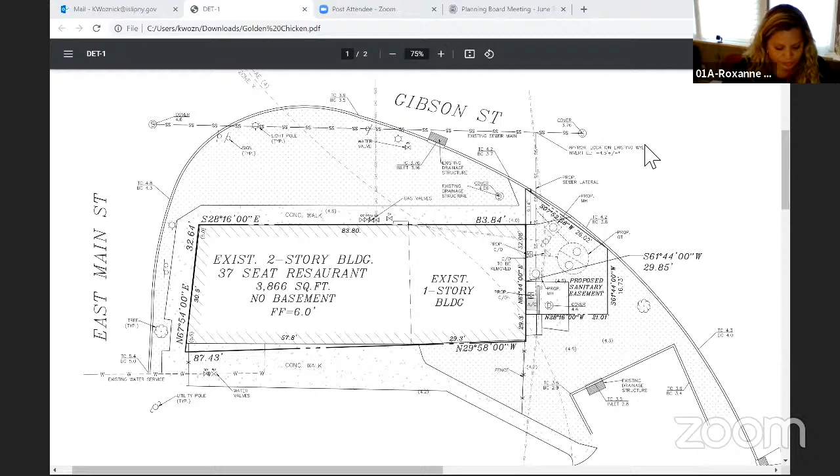Great, thank you. I do not see anyone who has signed up to speak on this application. Did anyone join us later who wishes to be heard? Please raise your hand or hit star 9 if you're on the phone.

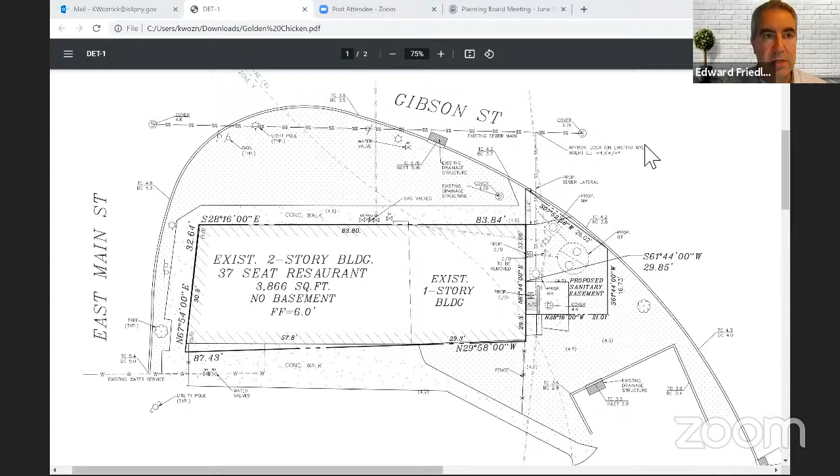Thank you, Ms. Wozniak. Any questions for the applicant? Any questions from Ms. Wozniak? Anything further from the applicant?

Mr. Chairman, just a question. Mr. Moriarty. Thank you, Mr. Chair.

Where is the current garbage located? I have no problem with the application, I think it's a good use. Obviously it's been in existence for quite a significant amount of time, but the rear of that building tends to be a mess. It's on a busy intersection in downtown Bayshore. It looks to me, and it's not just this particular applicant, so that's the question I'm asking, there appears to be 3 garbage disposal containers in a public parking lot back there. I know it's been going on for a long period of time, but it seems to me if we get a chance to at least put some screen up with respect to the garbage that's actually servicing that particular restaurant. So I guess the question I have for the applicant is, how is garbage currently being disposed of?

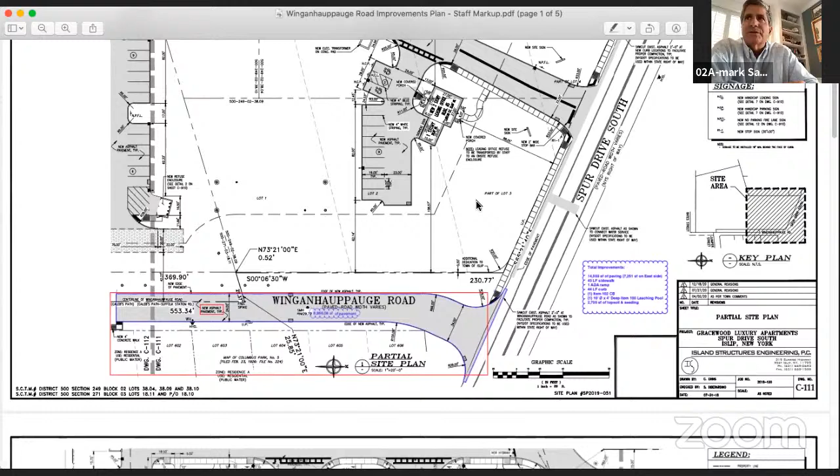Gracewood Luxury Apartments, owned partly by Spur Drive LLC, is a 96-unit apartment project located in Islip that is going through its final stages for its building permit. To fully understand the unusual circumstances of these additional improvements, I'd like to elaborate on our agreed-upon improvements on Winganhauppauge Road and Juniper Street, which we worked on with Lisa Anderson and several of our easterly neighbors.

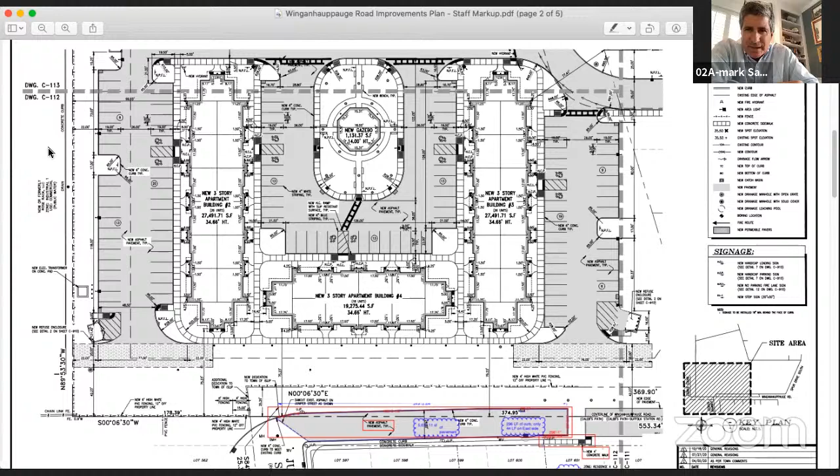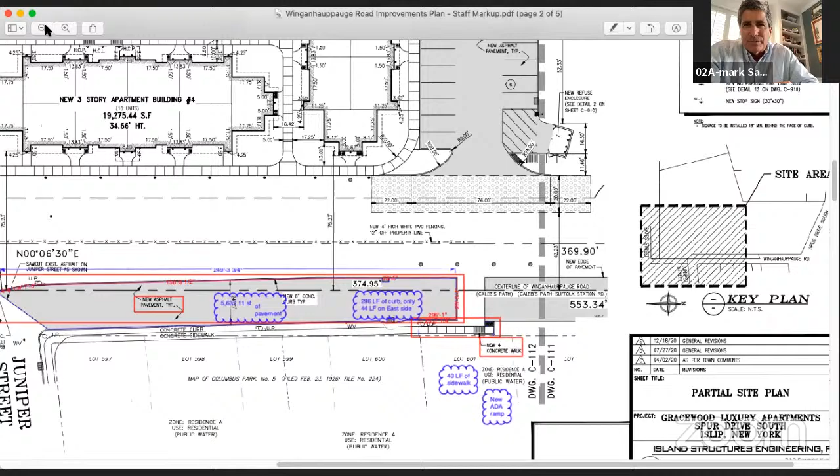That's the Juniper side we're showing now. It's the same street, but it has two different names, divided by an island in the middle. If we go a little further north, the roadway south of Spur Drive is Winganhauppauge Road. If you look at that dotted line, north of that is Winganhauppauge Road.

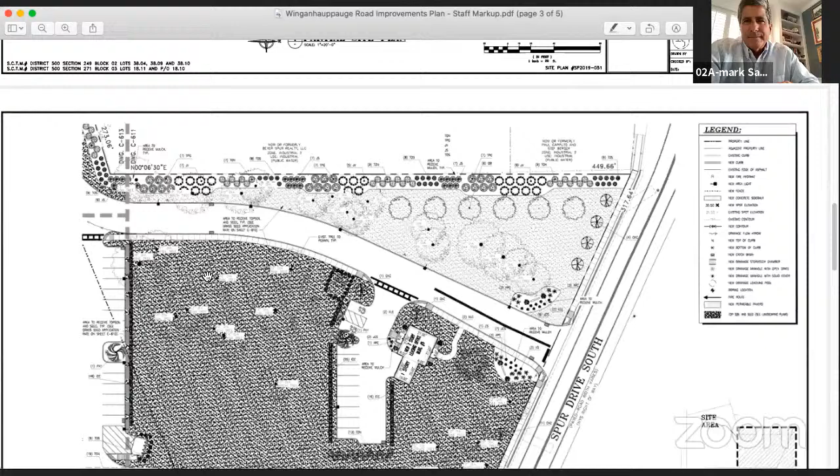That keeps scrolling down. I'm not sure if the board members can see Winganhauppauge, a little further down. Here it is. So off of Spur Drive it's called Winganhauppauge Road, then there's an island, then it's Juniper Street, which comes in off Islip Avenue.

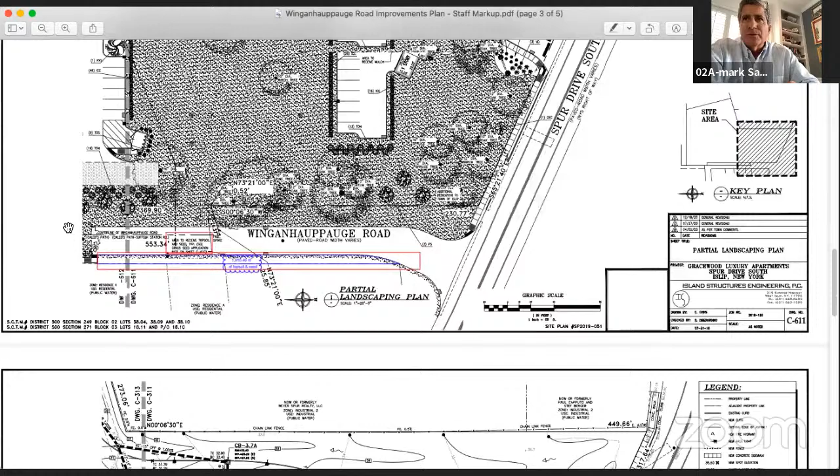So the roadway south of Spur Drive is Winganhauppauge, and there are a couple of homes on the east side of that street. As you travel south you'll encounter the landscaped island that separates Winganhauppauge Road from Juniper Street. On Juniper there are three homes, also on the east side, with the exception of one home owned by the Tavellas, which abuts our property on the southwest portion of Juniper. So there are three houses along there, and then one right there, which is Maria Tavella's house.

Per the town recommendation and our own normal course of business, we reached out to and listened to our neighbors' concerns and worked with them on objections and needs as we went through our change of zone. Over about 18 months we had several meetings, gained their confidence by showing them current and past projects, had them speak to existing tenants, and worked with them on improvements to enhance their frontage and resolve their individual road issues.

The residents on Winganhauppauge Road have a roadway that's partially broken asphalt and mostly RCA or stone, with some drainage issues. We agreed with those homeowners to correct the drainage issue by putting drainage in and redoing the entire roadway from Spur Drive right up to the landscaped island, on both sides of the road.

Those residents wanted to keep the rural look, so they were adamant about not having curbs and sidewalks. But they did agree to the town of Islip fence required along the easterly property line that we have to install.

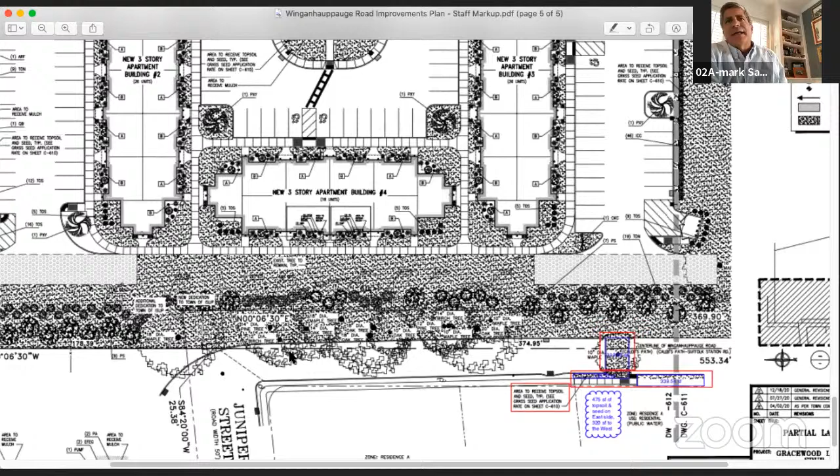There is existing drainage already on Juniper as well. Now, the existing landscaping island that separates the two will be completely removed and redone with new plantings and a sidewalk that would only allow pedestrians to walk from Winganhauppauge to Juniper and vice versa. That island was something of a bone of contention early on with the town, but they agreed to leave it because I guess at one point cars were going through from Spur Drive to Islip Avenue. It was a cut-through area.

So all the homeowners there, as we left it, were extremely happy with what we were doing. So in hopes that I explained this properly to the chairman and the board, my request for relief is to show that in round numbers, we are planning on investing about $220,000 or so, and that was pre-COVID pricing. That was done about a year and a half ago, into the town right-of-way, of which about 120 of it is above and beyond what we calculated as our normal Town of Islip code obligations, including mitigation fees.

We feel that the $18,720 is not really fair and request that we get relief. We do understand that it's a code, and that's why we're here this evening. I would like to say that the town's always been fair and equitable with all my projects spanning some 40 years now, and I believe with this application we met both the needs of the residents and the Town of Islip. So with your consideration for relief on this matter, it would be greatly appreciated. If you'd like, I have a photo looking from Spur Drive down Winganhauppauge, a picture's worth 1,000 words. I'm just not sure how to do it on my iPhone, but I could certainly show it to you.

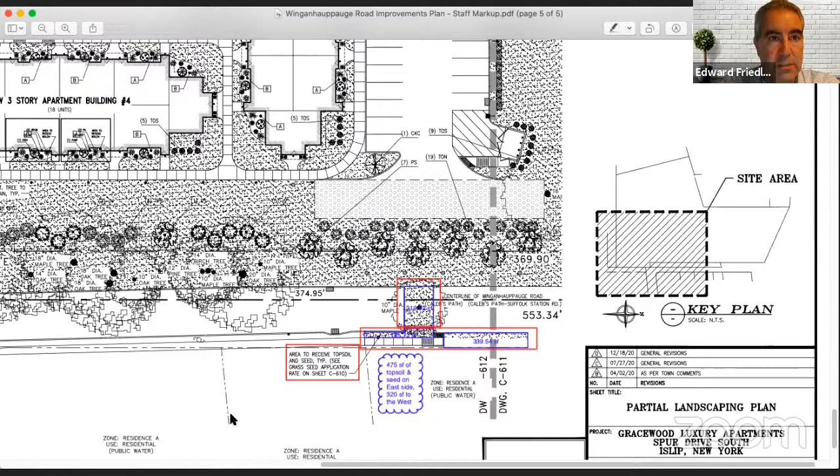Not seeing any. I would like to see the pictures. Okay, uh-oh, tell me, go downhill from here. Let's see how good your technology skills are. All right, Tanner, I need your help. All right, let's see.

Thank you. Any further questions? Anything further from the applicant? No, I'm fine, thank you. Is there a motion?

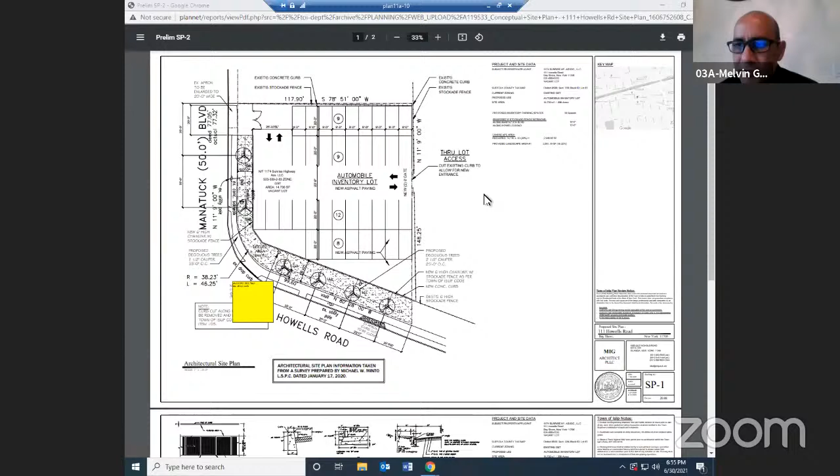Good evening to the applicant. Good evening, Mr. Chairman and members of the board. My name is Mel Gonzalez, MIG Architect, PLLC, 1050 Old Nichols Road, Suite 200, Islandia, New York, 11749. I'm here representing the owners of the subject property on the corner of Manatuck Boulevard and Howells Road.

What we're proposing is, currently the lot is vacant. We had been before the board previously, and the planning department had requested some information with respect to some comments that were addressed in our preliminary site plan. We've complied with those items, and one of the items on their concern list was with respect to photometrics on the property.

What we've done is the owners hired a company to provide photometrics not only of our proposed project, but also of the adjoining dealership, Bright Bay Lincoln, along Manatuck Boulevard and Sunrise Highway. We submitted the photometrics to the planning department for review. We provided two types of photometrics: the current photometrics of the existing light fixtures, and what we're proposing on our subject property. In addition, we proposed photometrics with shielding of the existing light fixtures to mitigate any exposure or spread of lighting into the residential neighborhood.

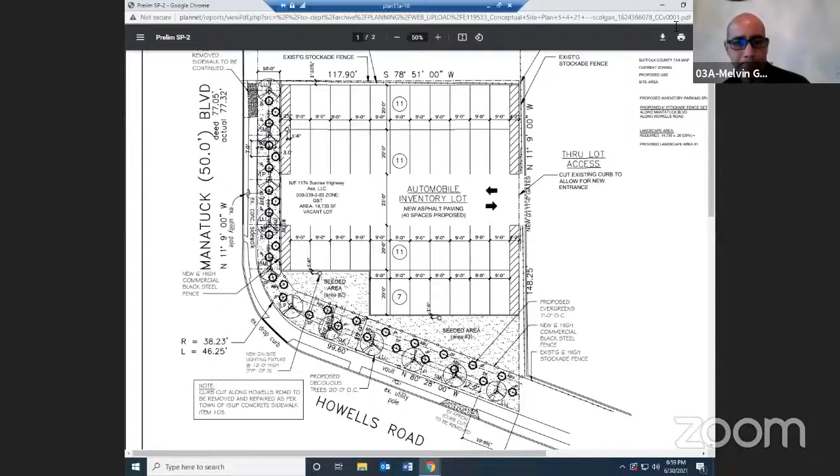Thank you, Mr. Chairman, members of the board. This application was previously heard on December 9th last year. The primary concerns raised then were the landscaping, the lighting, and roadway drainage. The applicant submitted a revised site plan, which shows additional landscaping and closes off the Manatuck Boulevard curb cut.

Any new lighting on the subject property will be required to prevent light trespass. The drainage is reviewed in conjunction with site plan review, which will be required should this application be approved by the board. Staff has further recommended additional plantings along Manatuck Boulevard north of the subject site.

Staff has discussed these issues with the town engineer. He has suggested that the existing lighting be reviewed by an engineering inspector and require additional shielding of those lights if necessary based on the results of that inspection. In addition, he requested additional plantings as space permits, and opaque fencing behind the front yard landscaping to better mitigate any light glare from the proposed lights and the existing lights on the existing dealership.

If the board is satisfied that the proposed layout and covenants address these concerns, staff recommends that the board grant the application subject to these conditions and the covenants attached in your packets. Thank you. Any questions from the board?

Mr. Gonzalez: I think there are about four things that Mr. Colgan outlined. I want to make sure the applicant is okay with those. First, if needed, additional shielding to lighting will be provided if the town engineer determines it's needed. Response: Yes, that's acceptable to the client.

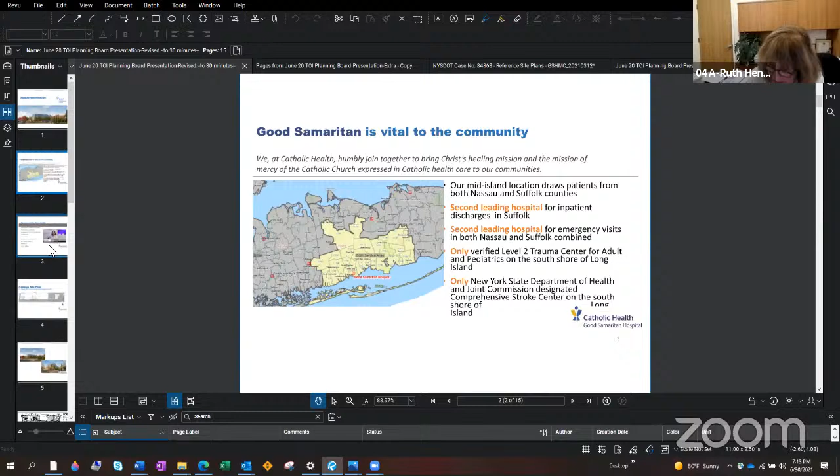Could you back up one slide, please? Thank you. Good Samaritan is vital to the community. You'll note on the map included, the pale yellow area represents the Good Samaritan primary and secondary service area. We are the second leading hospital for inpatient discharges in Suffolk County, and the second leading hospital for emergency department visits in both Nassau and Suffolk County. We're the only level 2 designated trauma center for adult and pediatrics on the South Shore of Long Island.

And we're the only New York State Department of Health and Joint Commission designated comprehensive stroke center on the South Shore of Long Island. Please advance the slide. In addition to serving the needs of the community through healthcare prevention services provided in outpatient, inpatient, subacute, and home care settings, we are a proud sponsor of many groups and activities. Good Samaritan has enjoyed a long history of service to the community through comprehensive clinical programs, such as the Cancer Institute and Comprehensive Stroke Center. In addition to responsiveness to community circumstances, years ago we weathered the storm with Hurricane Sandy, which identified new facility needs required to provide care in a safe and effective manner during times of natural disaster.

Most recently, we rose to the needs of the community with the diagnosis, treatment, and care of those impacted by the coronavirus pandemic. This presented an enormous need for the community. We treated over 3,200 inpatients, provided vital monoclonal antibody treatments for hundreds of outpatients through our emergency department, in addition to serving as a significant resource for testing and vaccination initiatives in our primary and secondary service areas. With that, I would like to turn it over to Mr. Joseph Liacano, who is Good Samaritan Senior Vice President for Business Development and Planning. Thank you.

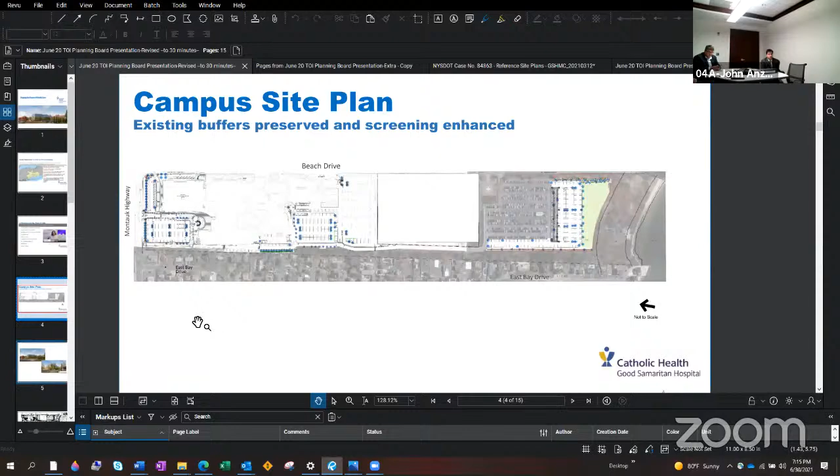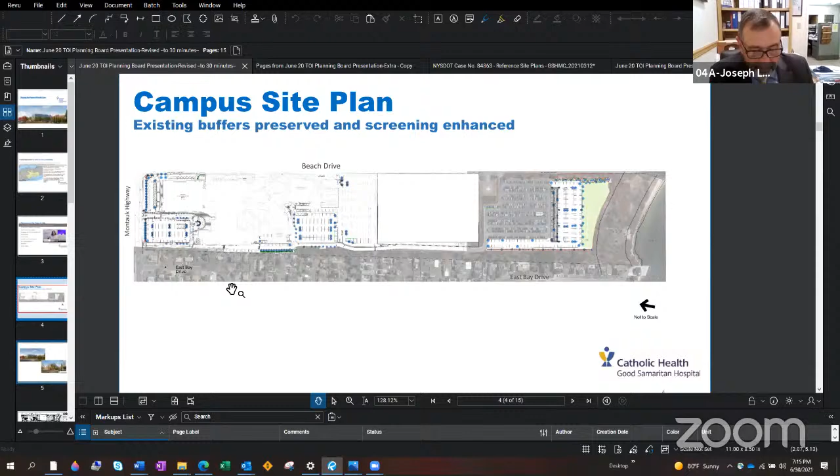Sorry, I was muted. Thank you, Ruth, and thank you to members of the Planning Board for hearing our application. Over the past 2 years, Good Samaritan's leadership team has had the opportunity to meet with various community organizations, resident associations, and individually with many of our neighbors. I'd like to thank many of those residents who I've had the opportunity to meet with personally at their homes. In some cases, they've invited me into their homes to look at what our facility would look like from their decks and kitchen windows. I thank you very much for that input. The purpose of those meetings was to inform the community with clear, transparent, and accurate information, and to hear feedback, comments, and concerns, particularly from nearby residents.

Community comments were mainly focused around parking, traffic, and aesthetics. This slide shows an overall view of the campus, stretching from Montauk Highway on the left all the way to the water, the Great South Bay, on the right. We were able to illustrate the location of different homes and the impact of the facility project by overlaying Google Maps onto the facility's site plan.

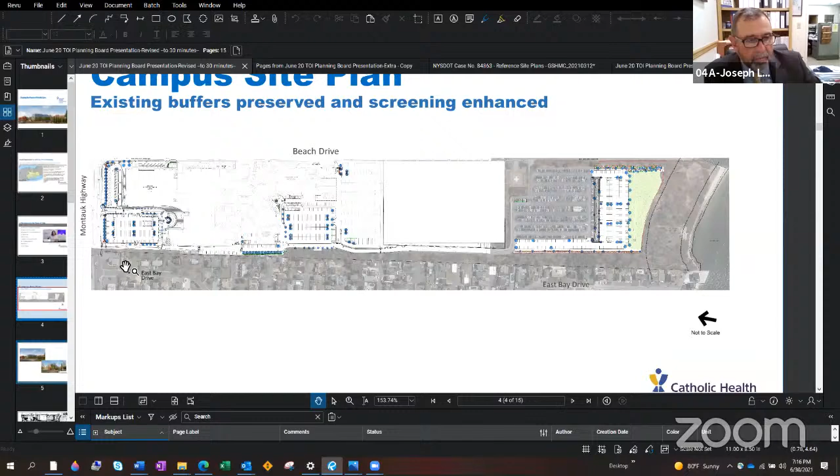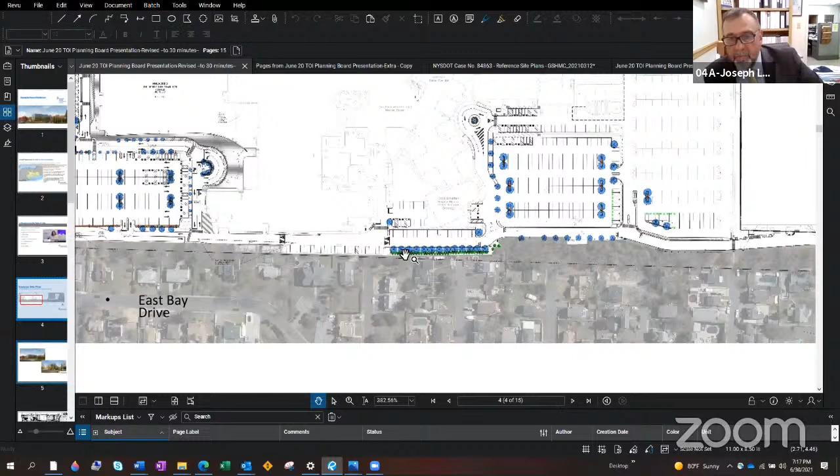Moving down what we call our West Drive from Montauk Highway—Dan, if you just follow the cursor down to the first buffer, this is where, right there, thank you—this is where Mr. Anzalone was speaking about. Right there, the homes are very close to the existing West Drive and a parking area. We've relocated that parking area and expanded the buffer with plantings of mature growth trees. I believe they're called 5-inch caliber trees, but they're about 14 to 16 feet in height. As we continue further down, you can see the existing buffer is not disturbed at all, so the buffer that we enjoy now remains. Keep going south, Kevin, Dan, please.

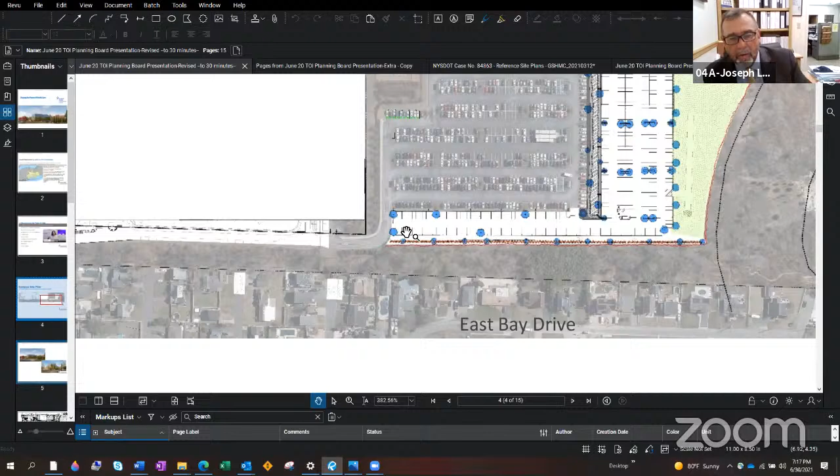We are proposing to add some additional parking for our employees, depicted in the white area here. That parking will allow employees a place to park, and will also allow more convenient, close-by parking near the clinical area of the hospital for the convenience and safety of our patients and visitors.

We've taken further steps with the parking area, and I've had the opportunity to meet with a lot of the neighbors along that western border, because what we want to do is shield or screen that new parking area and the old parking area from view. The red line shown is a tightly packed, densely planted row of 14 to 16 foot evergreen trees, which will enhance the existing buffer and screen the view from the parking lot. We were able to do the same thing on the eastern side of the hospital.

Where the cursor is now is along the marina and ball fields. Again, we were able to plant, without disturbing the existing buffer, another tightly packed row of mature growth evergreen trees in addition.

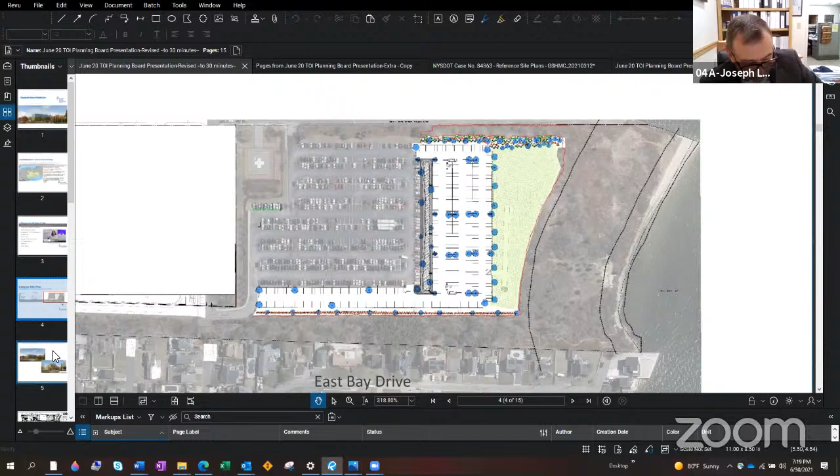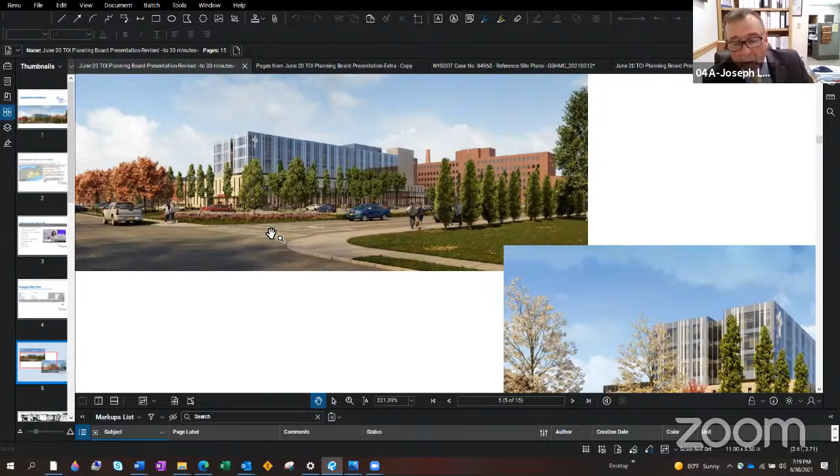This is a view of the proposed building. The first one on the left is a view from Montauk Highway looking east, which is what we call our West Drive. On the right, that is a view down what we call our Center Drive from Montauk Highway, which would be the primary access to the emergency room.

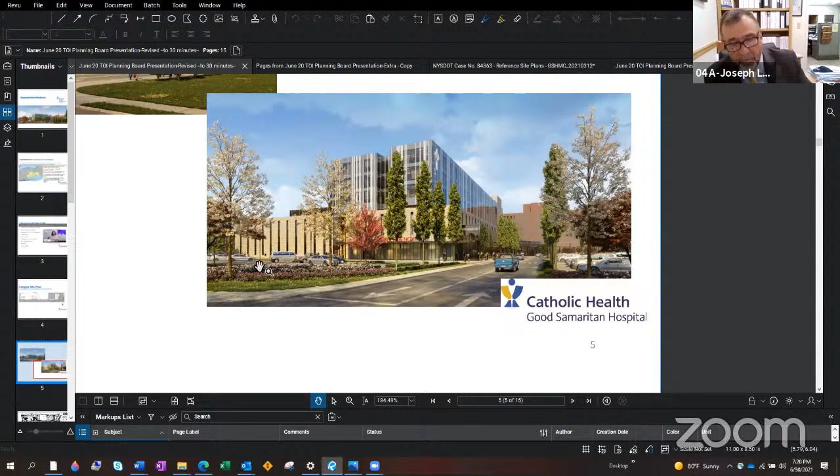Where that blue pickup truck is would be the drop-off area. The truck would go in, make a left, and drop patients off right there at the emergency department, then park in front of it. There's no access to the emergency department any longer from Beach Drive, and the emergency department is relocated away from the residential area and ball fields on Beach Drive to the northern end of the campus.

The building architecture is built on the notion of enhancing patient experience. The glass gallery and the stone base create a welcoming experience, help in finding one's destination, and enhance the patient experience while reducing anxiety.

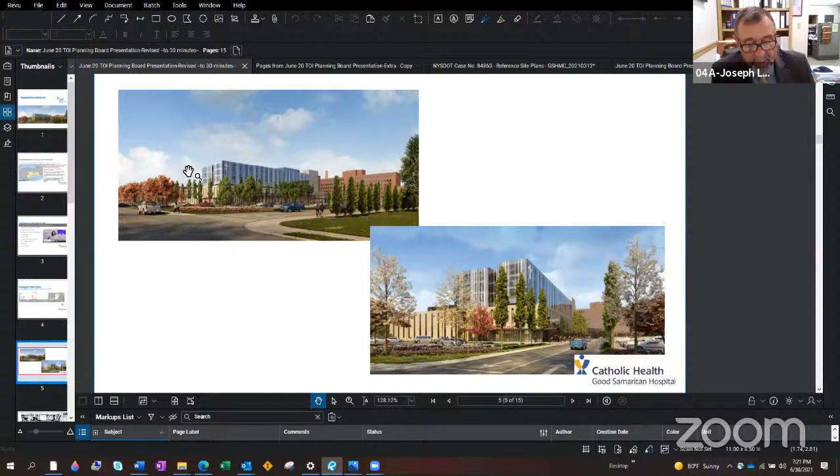We opted for the stone base with intentional window slots, as it reflects the strong foundation of the hospital - a modern interpretation as an anchor base, similar to the beacon structures on Jones Beach created by Robert Moses. We wanted the patient rooms to be elevated and light in materiality, so we opted for a glass and frit pattern. Improved visibility for patients will help ease anxiety for hospitalized patients and reflects the modern advancement of medicine. The glazing will also help reflect the surrounding area, making it less of a pronounced mass, lighter on the eyes than if it had been more solid, such as continuing the brick of the existing hospital.

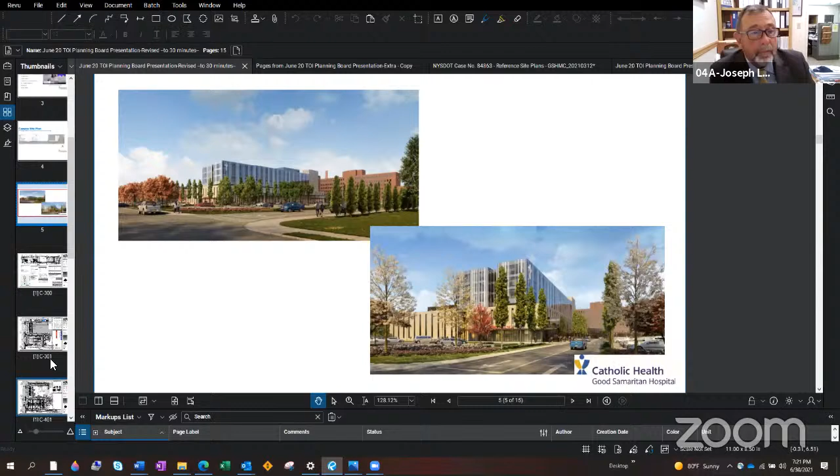Next slide, please. We are going to move further down into John McMurray's section.

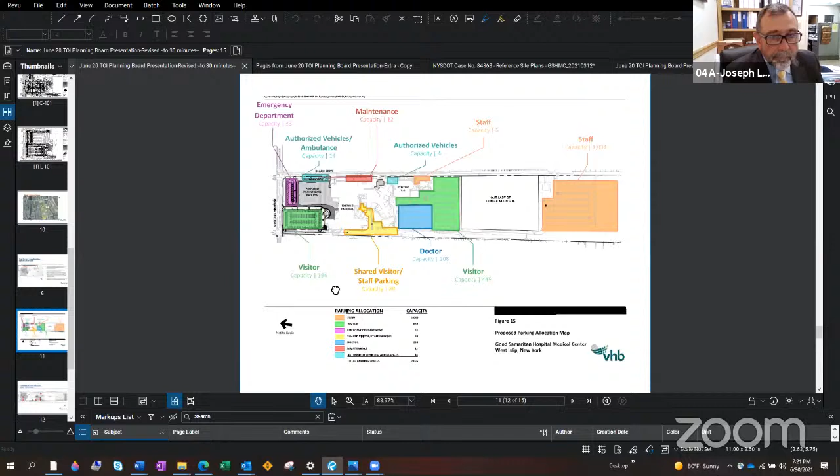Leading into the planning of the project, we acknowledge the need to address campus parking concerns. We've had great success enforcing our patient and visitor policies with our clinical staff and employees, and expect that to continue throughout all phases of construction.

As you'll hear from our traffic study overview, we anticipate a reduction of traffic on Beach Drive due to the relocation of the emergency department to the front of the campus, as well as the elimination of visitors and staff having the ability to egress onto Beach Drive and enter the emergency department. We've also planned to eliminate access to the employee parking lot by employees from Beach Drive through the nursing home. That was a suggestion made by some local residents, and we're thankful for that.

Lastly, during the post-construction phase, the campus parking transformation will result in a convenient patient and visitor focus moving into the future. As you can see from the slide, visitor parking is close up near the hospital, while employee or staff parking is located furthest away, with a shuttle bus provided for the safety and convenience of staff getting back to work. Doctors' parking is also close by the hospital, along with parking for the emergency room.

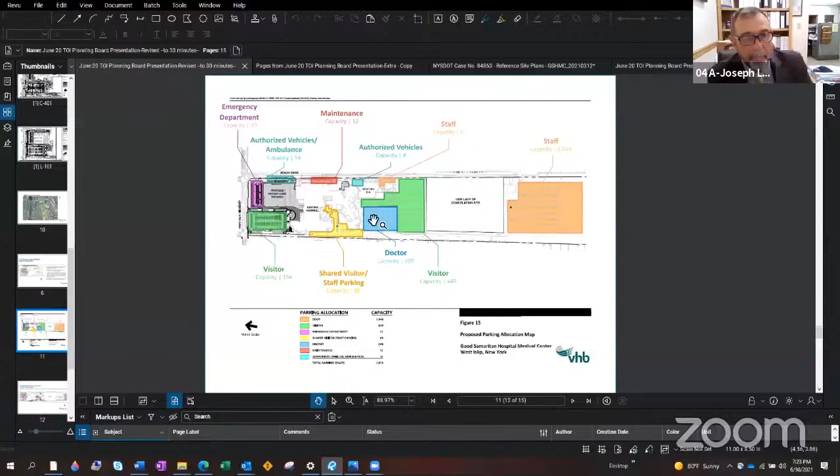This slide shows the location of the proposed patient care pavilion and the proposed emergency room, relocated from its existing location north to Montauk Highway, essentially.

Some highlights: we've eliminated the entrance to the emergency room from Beach Drive to reduce traffic, and redirected the cars to our center drive.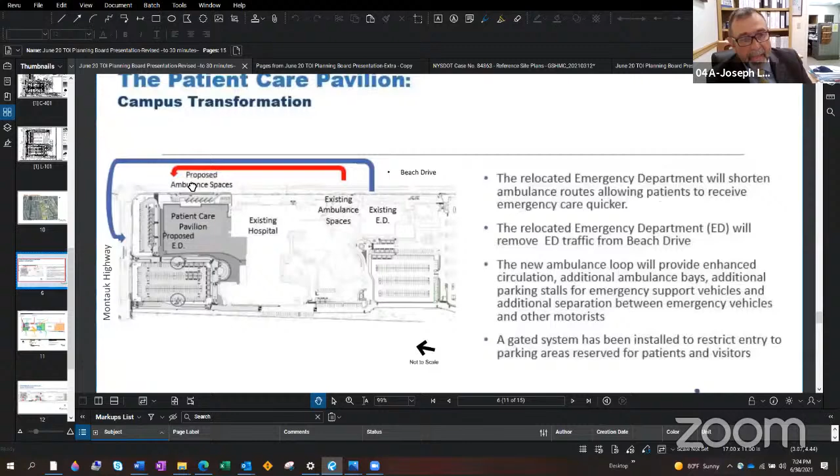We've also been able to create a new ambulance drop-off area along Beach Drive. That area is a little different than the one we have now to the south, as it'll accommodate 4 more ambulances and allow them to do all their backup and drop-off maneuvers off of Beach Drive without obstructing traffic. We took input from the ambulance crews from various local departments, and they were very instrumental in designing that drop-off, and I thank them for that.

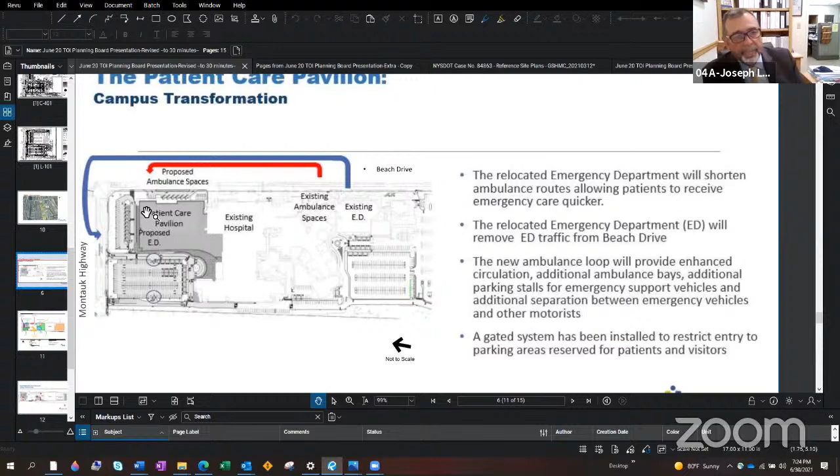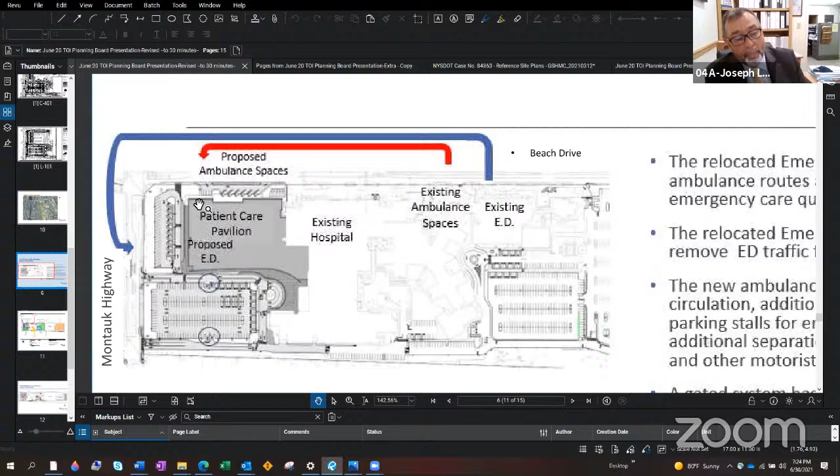We've also taken note, through our many discussions with residents, about emergency vehicles and law enforcement vehicles sometimes parking along Beach Drive with their wheels on the curb. So what we've done is create a special restricted parking area for police cars only. That area is conveniently located near an entrance to the emergency room, providing fast and easy access for police cars, eliminating the need for them to pull up on the curb and block the sidewalk and traffic. I'm confident that parking area will be well utilized.

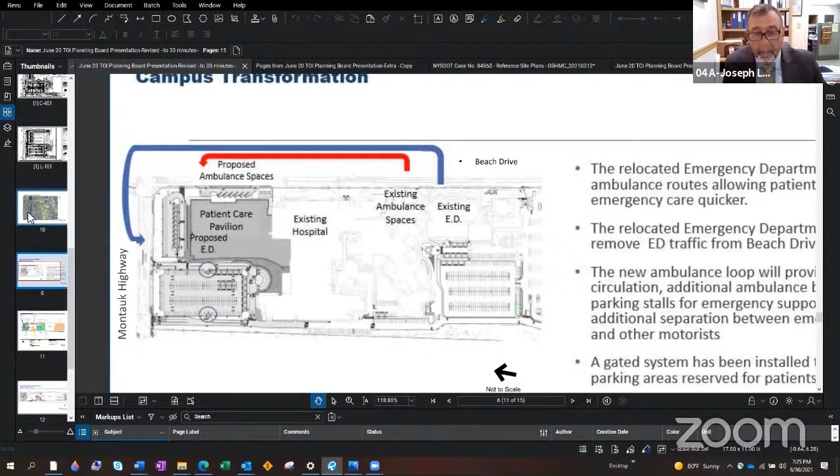At this point, I'll turn the presentation over to Kevin Walsh, our Senior Managing Director for our civil engineer, VHB.

Thanks, Joe. Good evening, members of the board. What I'm going to do is briefly, hopefully without repeating too much of what you've heard, walk through the site plan documents for some visual context on the improvements being proposed.

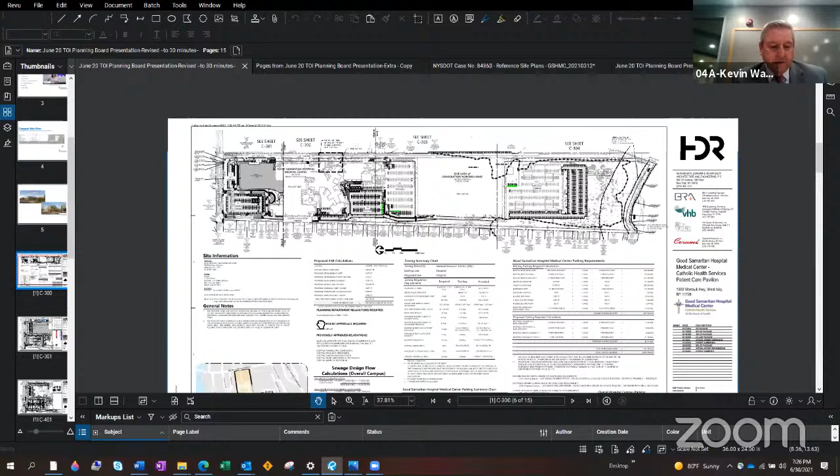Some of the things talked about so far you may see more clearly on the engineering plans as we go through them. As you know, the campus extends from Montauk Highway, a New York State road, to the Great South Bay, bordered on the east by Beach Drive across from St. John the Baptist High School, a residential neighborhood, a town park with ball fields and a marina, and on the west by the residential neighborhood we've been referring to.

The current site of the proposed patient care pavilion predominantly consists today of the visitor parking area and the main entrance loop. We'll point out on this plan, as well as the next, the location of the current emergency department ambulance drop-off area, about 1,200 feet south of Montauk Highway on Beach Drive, basically opposite the south end of St. John the Baptist. You'll see in contrast on the coming slides the proposed relocation of that facility in just a second.

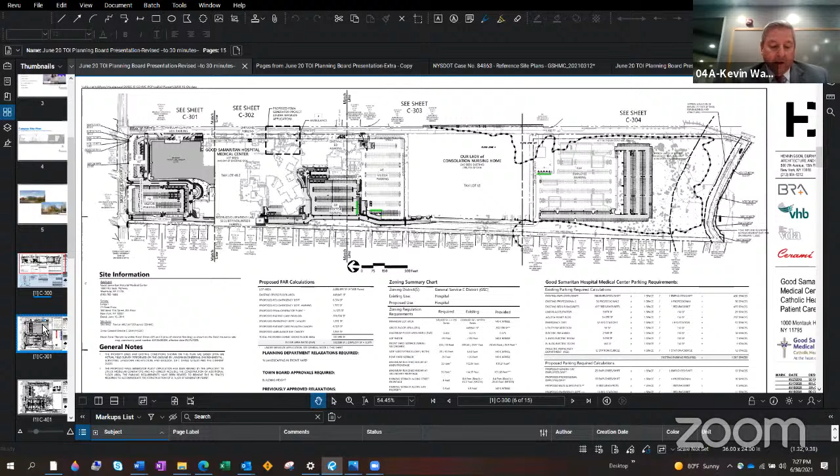The rest of this sheet basically covers zoning compliance, discussed in detail by Mr. Anzalone, so I'll skip over that. I'll also leave the discussion of parking and site access to Mr. Winkleman, who will follow me in this presentation. Let's go to the next one.

Here we have the larger scale detail of the site layout, focusing on the patient care pavilion site, the subject of this discussion tonight. The patient care pavilion will be an extension off the front or north side of the existing building, generally displacing the existing visitor parking lot, as I mentioned. The proposed building is approximately 337 feet by 248 feet in gross dimensions, 6 stories in height, comprising approximately 300,000 square feet of gross floor area.

As part of these improvements, the emergency department is being relocated from the area noted before to the new patient care pavilion addition, with the ambulance bays located along the east side of the new addition, providing 6 dedicated ambulance bays, plus additional separate parking for police and security vehicles, as Mr. Loicano pointed out.

The emergency department general drop-off area is located along the front or north side of the new addition, with one-way circulation from the center access drive, providing drop-off lanes along the front of the building and allowing vehicles to continue around the loop to the emergency department parking, where there are 33 total spaces provided.

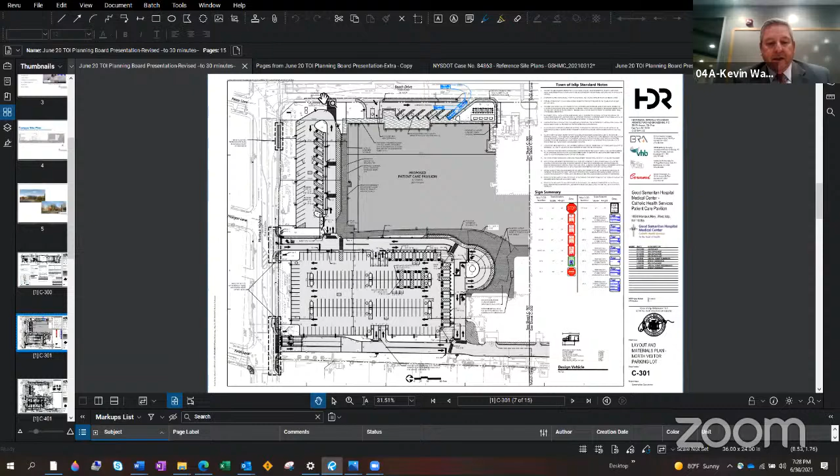I'm sorry, stay there for a second, Dan. I just want to go back and point out that the access drive or driveway shown to Beach Drive from the emergency drop-off area is for fire access only, to meet fire codes for the maneuvering of emergency vehicles that may not be able to make that turn should they need to be in that area.

That will not be open to the public. It'll be covered with grass pavers or something along those lines, and again will serve for emergency purposes only.

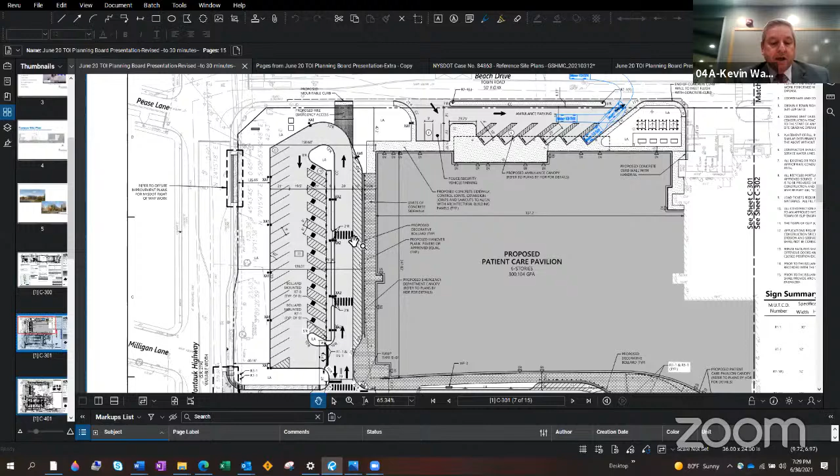I'll mention while we're on this slide that we're maintaining the existing location of the center access drive, which feeds the emergency department drop-off and parking, as well as the newly reconstructed northwest parking lot. It connects to the new drop-off loop at the main entrance, and then it continues to the west road as before. Okay, now we can move on.

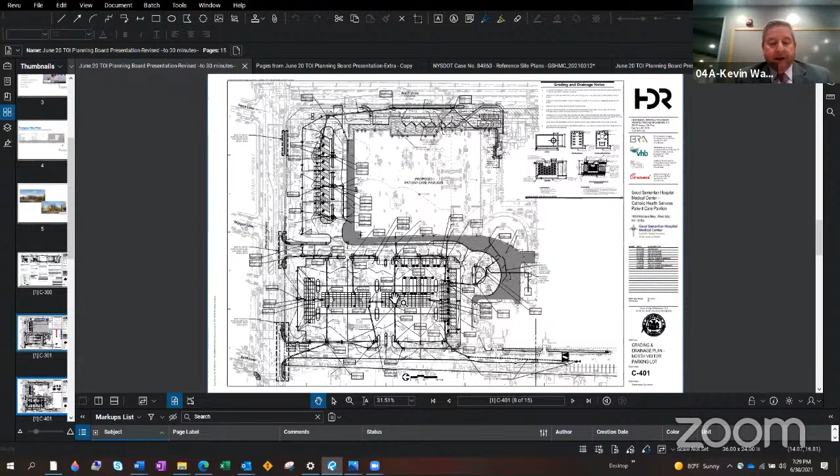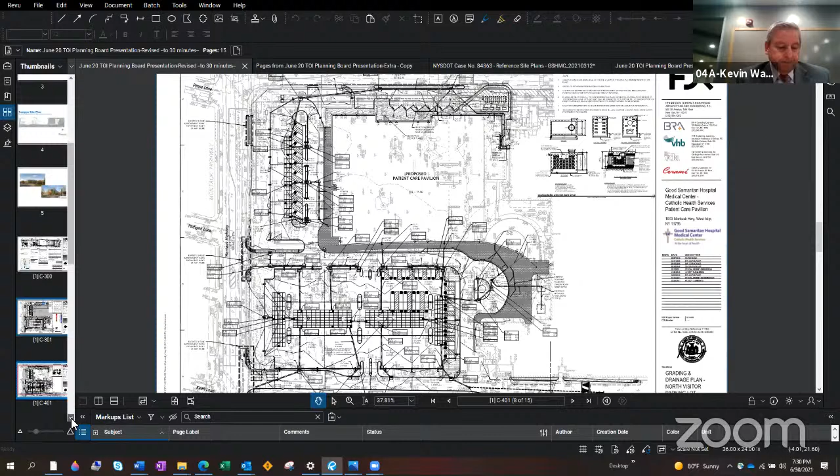Very briefly, I want to depict the grading and drainage improvements that are part of this project. The project provides for complete reconstruction of the parking and roadways within the project area, including the emergency department and northwest parking lots. To improve the handling of storm drainage on the site, we're installing approximately 350 shallow concrete leaching galleys, which will store stormwater for the new northwest parking area and the patient care pavilion building, while maintaining the required separation to groundwater, which is a significant improvement over current conditions. Okay, next.

Last, we'll take a quick look at the detailed landscape plan, which provides for decorative plantings at the entrance points, and provides for street trees along Montauk Highway in conformance with site plan regulations. Generally speaking, as Mr. Loicano pointed out, we intend to comply with town requirements regarding the number and spacing of street trees along the road frontages, including both Montauk and Beach.

However, we do plan to work with the planning department and engineering department regarding clustering some of those additional trees where we can't fit them in areas that are physically limited by, for example, the emergency and ambulance access and ambulance parking. But we expect to provide the same number of trees that would normally be required.

I'll also note that we're using much larger caliper trees than would be typical for new construction, along the lines of 5.5 to 6 inch caliper, whereas 3 to 3.5 inches might be more typical for new construction. Again, we're trying to create that mature look from day one, as opposed to waiting for materials to grow in.

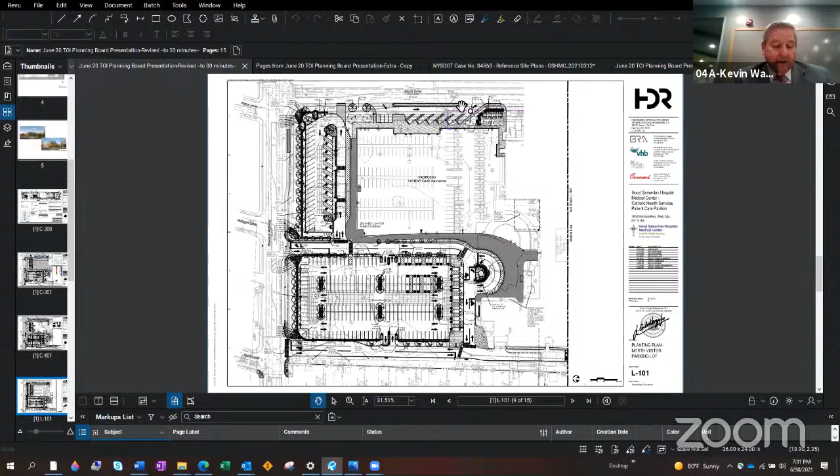The plan provides for full screening of the parking areas from the public roads. It provides for full screening of utilities along Beach Drive, and again, it maintains the buffers along the west property line, along the West Road.

At this point, I will turn it over to Dan Winkleman from our office to discuss the traffic and parking.

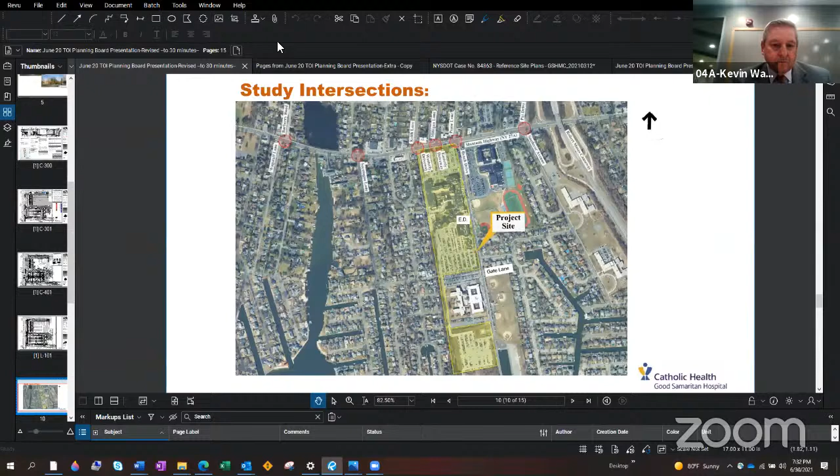Good evening, Chairman, members of the board. My name is Daniel Winkleman, and I'm the Transportation Systems Team Leader at VHB's Long Island office. As mentioned by Mr. Anzalone, I was retained by the applicant to conduct a detailed traffic impact and parking study to evaluate the potential impacts to the transportation system surrounding the site, as well as the adequacy of the off-street parking provided.

In doing so, I worked very closely with town planning staff, the town's traffic safety division, the town's traffic consultant LKMA, and the New York State DOT. During the preparation of my study, we had many meetings with these agencies and departments, and believe we have developed a very comprehensive plan to manage traffic and access, as well as to ensure that the parking is managed and effectively utilized during and after the project.

The limits of my traffic study include looking at the segments of Montauk Highway between Wagstaff Lane and Snedeker Avenue. In addition, we also looked at Beach Drive between Montauk Highway and the Marina. Specifically, it included analyses of the intersections of Wagstaff Lane and Barbary Road at Montauk Highway, Secatogue Lane at Montauk Highway, the Westerly Site Driveway across from Keith Lane at Montauk Highway, the Easterly Site Driveway and Milligan Lane at Montauk Highway, Beach Drive, Pease Lane at Montauk Highway, and Snedeker Avenue, Pat Drive at Montauk Highway.

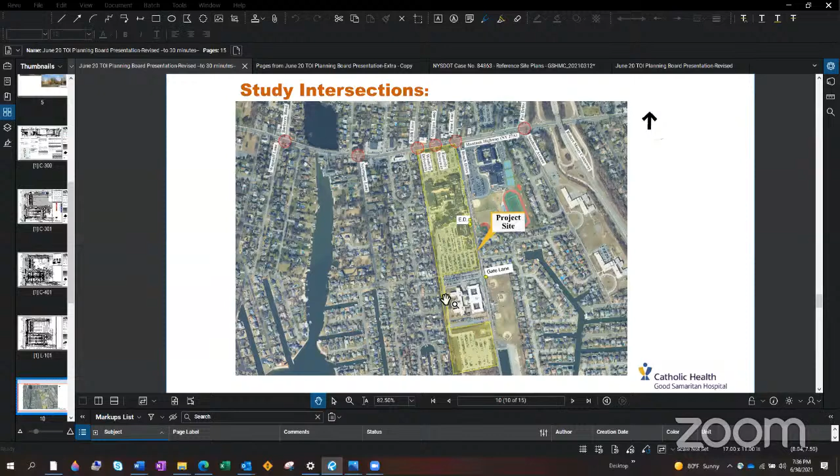These improvements will ensure that traffic is much more balanced between all of the site's accesses and that Beach Drive does not receive the bulk of the site's traffic. This would significantly help during peak periods, such as when the St. John's School has its afternoon dismissal, which often coincides with when the hospital has its shift change.

Due to the shifts in how traffic will access the site, after the project is completed, minor signal timing modifications are recommended at the intersections of Beach Drive at Montauk Highway and Montauk Highway at the site's westerly access across from Keith Lane. With these signal timing modifications implemented, conditions would be much similar to what would be experienced in the no-build condition, meaning if the project wasn't constructed.

It's important that I mention that this project is a modernization project and a right sizing of the hospital. Therefore, significant increases in traffic are not expected. While this is true, in order to provide a very conservative analysis, we did assume that there would be increases in the number of visitors, patients, ED visits, and employees. Even with these conservative assumptions, it's still expected that there would be less than 2 trips added to the roadway network per minute during peak times. These increases would not be expected to significantly impact traffic conditions.

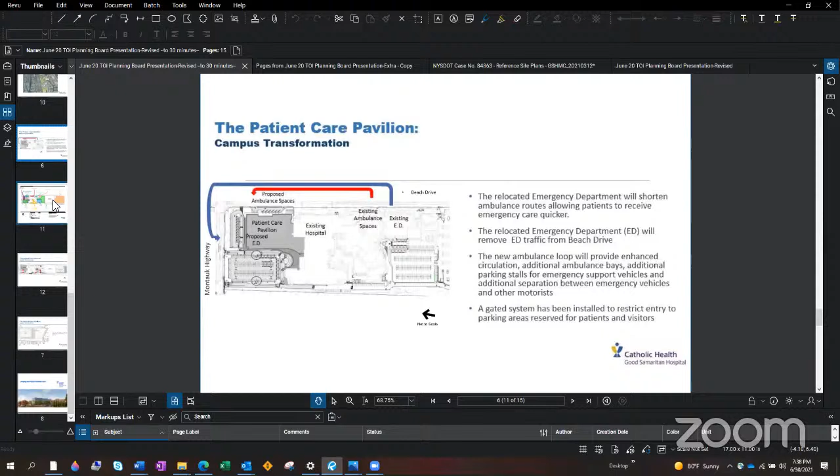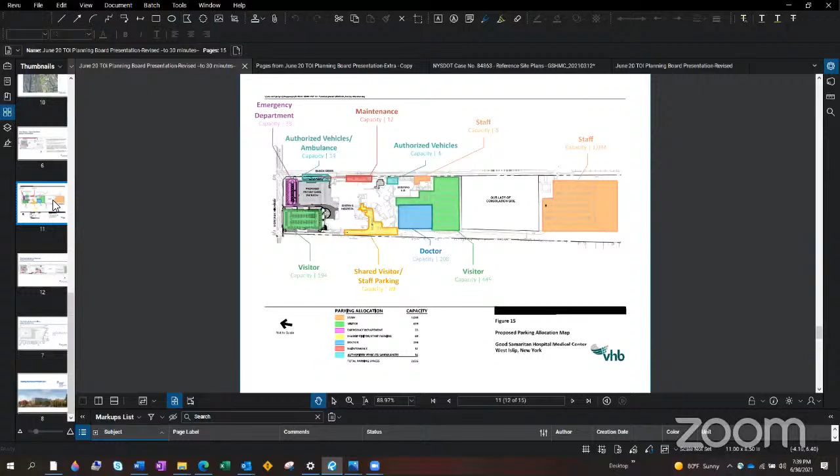The employees parking in the existing northerly visitor lot is somewhat of a parking issue perception currently. However, there is a vast amount of parking in the most southerly lot that has historically been underutilized. By implementing a series of gates to restrict parking in areas on campus, most specifically in the visitor parking lots, employees will have to park in the most southerly staff lot.

These proposed gates, which will help enforce parking and make it so allocated user groups use them, are represented in red. I should note that gates were recently installed on the existing northerly visitor lot to test their effectiveness in managing parking, and based upon my field observations, they have been working very well in regards to shifting employee parking demands to the south end of the campus.

Since more employees will park in the south lot, there are plans to enhance the employee bus shuttle service to provide 2 additional bus shelters in the lot. The shelters would be equipped with call boxes to contact security and a shuttle driver if needed. The shuttle service would be very frequent and very convenient for employees to use.

In addition to ensuring that there's a good plan in place to manage parking, it's also very important to know if there's adequate parking on campus to accommodate the future parking demands. In order to verify this, VHB performed parking observations of the existing parking demand and did parking projections to understand the amount of additional parking needed.

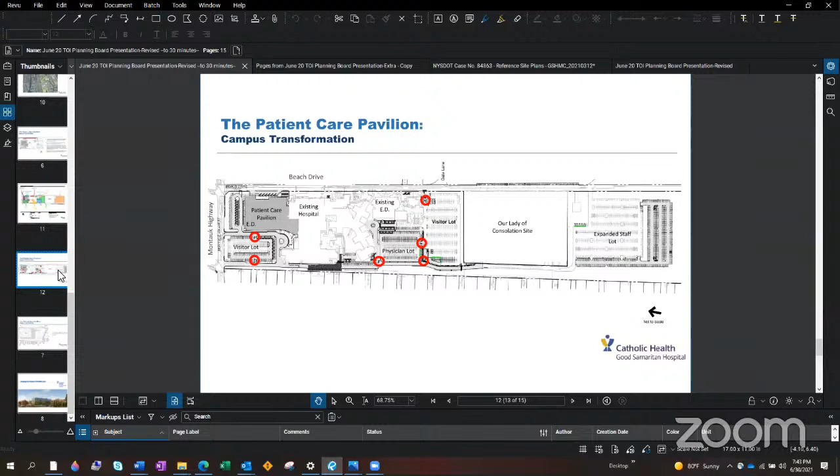Hi there folks. Hopefully you can hear me okay, and I'll be our last presenter. I'm going to try to be very quick. I have just a few very quick points to share with you as we wrap up. My name is David Wortman. I am the Senior Environmental Manager for VHB with offices in Hauppauge. VHB was also retained by Good Samaritan Hospital to prepare a full environmental assessment form, as well as a comprehensive expanded environmental assessment report, or expanded EA, to address key aspects of the project related to environmental impacts.

The expanded EA report includes, among other things, a detailed description of the patient care pavilion, the purpose, need, and benefits of the proposed action, traffic and transportation impacts that you just heard in detail about the traffic impact study that was prepared. That was presented within the expanded EA and details the various benefits with respect to beach drive conditions and site parking conditions.

The expanded EA also addressed changes in visual conditions and aesthetic character, as well as shadow impacts, and there are detailed renderings of the proposed facility and a shadow study presented within the expanded EA. Given the waterfront location of the campus along the Great South Bay, the expanded EA also addressed issues of flooding and coastal resiliency. With regard to those topics, I'll first mention that the hospital's been planning and implementing a variety of infrastructure upgrades and site improvements to address potential flooding and resiliency issues separate and apart from this project.

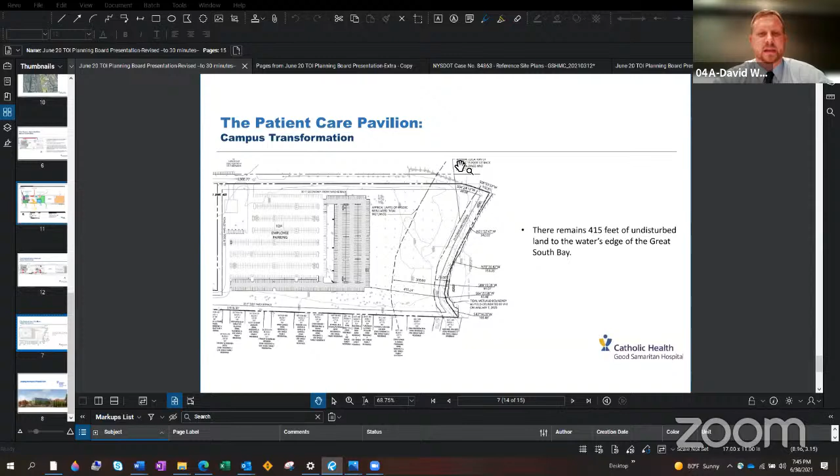With regard to coastal resources, there are tidal wetlands associated with the Great South Bay in the vicinity of the hospital campus, and specifically the nearest mapped tidal wetlands are located, of course, along the shoreline of the bay at the south end of the campus.

The proposed patient care pavilion would be located over 2,000 feet from the marina and over 3,000 feet from the Great South Bay itself. To put that into perspective, you can see on the figure presented, the New York State Department of Environmental Conservation, or DEC, which has permitting jurisdiction over tidal wetlands and their adjacent areas, regulates activities within the wetlands and within areas up to 300 feet upland.

So as you can see, the patient care pavilion would be located well outside of the regulated areas for the tidal wetlands, and we would not expect any adverse effects upon those resources.

Similarly, the proposed parking lot expansion at the southern portion of the campus is expected to occur outside of the regulated adjacent area of the DEC, whereas the proposed parking lot would be located greater than 400 feet from the limits of the nearest tidal wetlands at the Great South Bay.

Last, substantial stormwater management improvements are proposed as part of the overall project, such that stormwater runoff would be collected and recharged to the ground on site, thereby also minimizing or eliminating potential associated impacts on these coastal resources.

As we detailed in the expanded EA report, the proposed projects would be consistent with the relevant goals of the South Shore Estuary Reserve Comprehensive Management Plan, and would further comply with the relevant coastal policies set forth within the New York State Department of State's Coastal Management Program.

Yes, go ahead. Good evening, Chairman and members of the board and other members of the public. My name is Brian Brannigan. I'm the president of the Babylon Beach Estates of West Islip for the last 12 years. I've spoken at many of these hearings and represented my membership and the West Islip community. The Babylon Beach Estates Association has been in existence since 1942, which actually predates the existence of Good Samaritan Hospital. We're the only organization that has a real border with Good Samaritan Hospital, three-quarters of a mile. We're right to the west of the hospital.

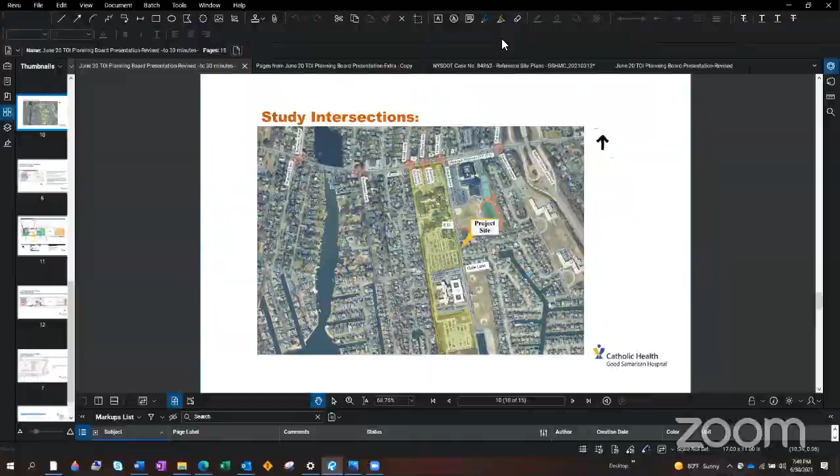I think the town board has the unique opportunity to figure out a way that we could meld the building of the hospital. I speak as a town resident. I also speak as president of the association. You might hear from some of my members that speak as tax-paying members as well, and they have their thoughts.

But West Islip has fielded a lot of the hospital's traffic and negative things, but the hospital's done a bunch of really good things, and I actually support the construction of the hospital. We need to have an up-to-date facility, we need to get new doctors. Justin and Ruth and John and Joe - Joe's done a great job. He talks about being in the living room and watching the property from my members' point of view.

I want to bring your attention to the traffic study. We could talk about parking, we could talk about where these cars are going to park, but the gentleman decided he was going to do a traffic study from Wagstaff to Secatogue. I'm going to ask the board, that seems super short-sighted.

We can't pretend that Secatogue and Wagstaff, because if you go less than a block to the east, there's Robert Moses Causeway. I did the math today - from the hospital it's a quarter mile from Robert Moses Causeway, and it's over a mile to 231. So they've decided they're going to shut down Beach Drive as any kind of egress or entrance for their employees or visitors, which is a town road.

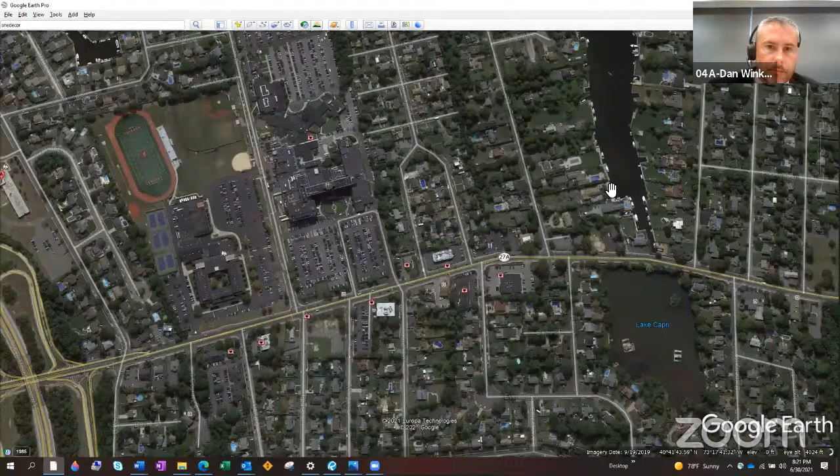How many cars does the queuing lane hold now for that? For the easterly—let me bring up the aerial here so I can make sure I have the correct location for you. So if we're talking about that turn lane right now, that's correct, Mr. Chairman? Yep, correct. It's approximately 5 vehicles that can be stored in that turn lane right now. And your traffic study suggests that'll remain the same? It would increase, but it would still be able to accommodate the capacity—probably approximately 1 car length more during peak times.

So just to try and understand this, I'm assuming the premise of only 1 or 2 trips per minute would be increased? Two trips per minute, essentially. How many cars were actually turning, heading from out east down Beach Drive, that you're now pushing to the other entrance? Currently, looking at the AM peak period, which is the heaviest inbound period, there are 60 vehicles in an hour going into that location. Let me get the proposed numbers for you.

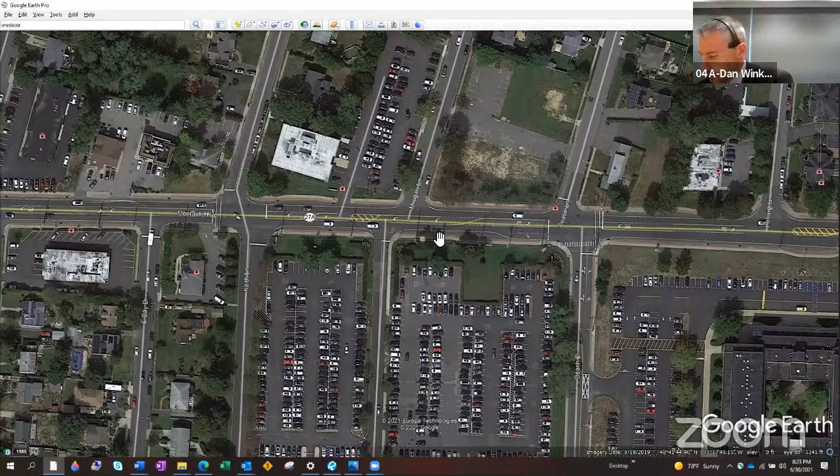It's essentially going to decrease, actually, and more traffic will use the westerly driveway because that is the employee entrance. So more employees are going to use this lane now.

So, do you have a breakdown of your emergency room traffic? You can take these as questions and submit them after the meeting if you don't have the answers in front of you. But do you have a breakdown as to what percentage of employees that use Beach Drive were employees versus emergency room use? Do you know how many daily trips to the emergency room by vehicle were down Beach Drive?

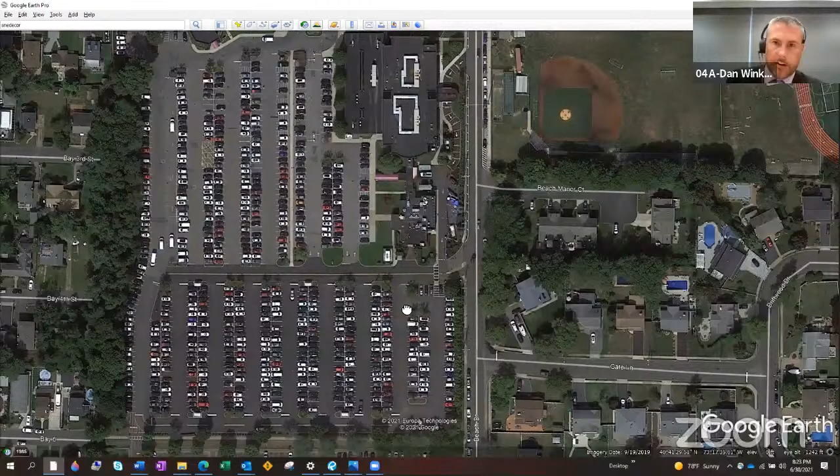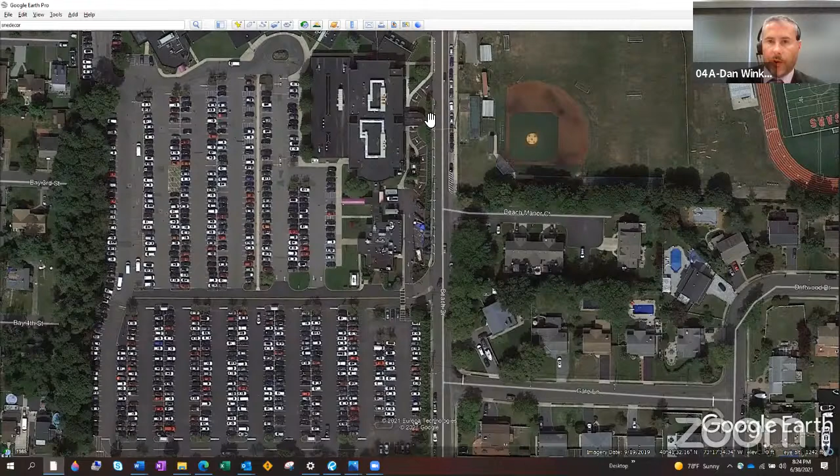We have estimates of the number of vehicles that go to the emergency room. Your emergency room traffic generally comes into this location here, and then they filter into the parking area. Not everyone does that - some still directly enter into Beach Drive and then walk to the emergency room. So we do have the number of vehicles, an estimate that was outlined in the traffic study, and we took those volumes and redistributed them to this location.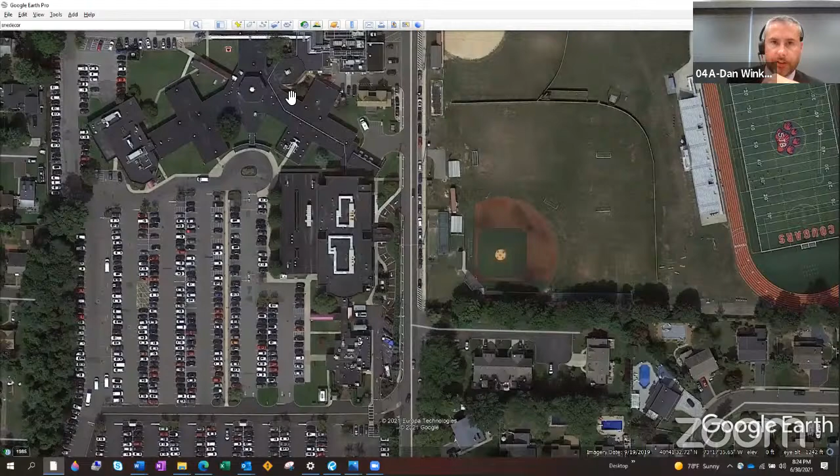But because we're removing a lot of staff that actually park in this northerly area, and we are parking them in the areas in the south part of the campus, we're changing the traffic patterns, which is why we're seeing a slight decrease here, an increase here during that AM period. And that was by design. We wanted to balance the traffic volumes, but we also wanted to direct traffic to a traffic signal where people could make their moves under the protection of a traffic signal, which is what we have at the westerly access.

And is there any discussion with the state about a turning signal, or any signal at the other entrance, in this location? There was no discussion or requirement for a traffic signal at that location. The volumes are too low to actually warrant a traffic signal.

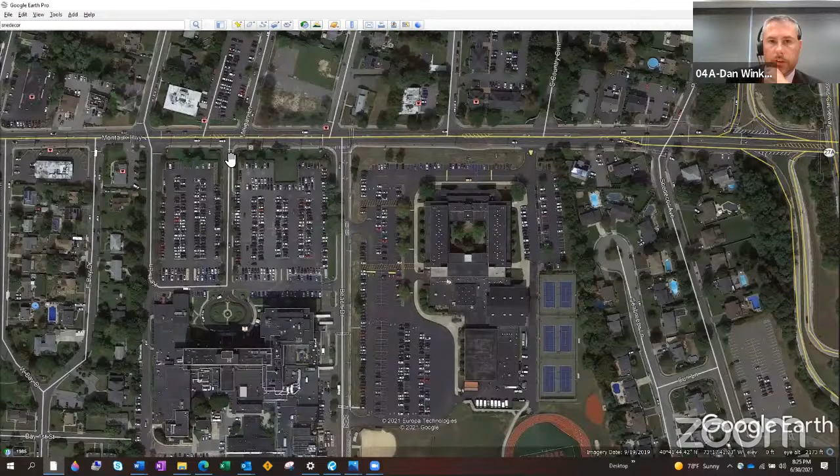We did look at it. We looked at multiple access scenarios, and it was very difficult because the site's frontage is so narrow, and there's an opposing street and an opposing use with another driveway in this location. So we did have discussions with the New York State DOT, and the access agreement, the access scenario that we've come up with, was the preferred scenario from them.

And in terms of the increased amount of cars making the right into that entrance now, the new emergency entrance that would have gone down Beach Drive, what is the increase there? Instead, if a nurse was coming from the west and going to the emergency room, they would have continued past this access and made the right. So there is going to be no change there.

They're simply going to make the right-hand turn in there, or they may use the westerly drive because it's actually going to be more convenient. My concern would be as they're making the right in, a car's waiting to make a left - obviously a car now slowing down to make the right versus driving by, what the increase would be into that intersection, into that entrance, if you know it.

I don't think there'll be any measurable increase. Okay, and then while we're on the Keith Lane entrance - I've been there plenty of times, born and raised in West Islip, not as many years as Mr. Whalen, but getting closely approaching that - but that does tend to be somewhat problematic in terms of people being confused as to what to do when it's off-centered. Was that at all looked at or discussed as part of the traffic study?

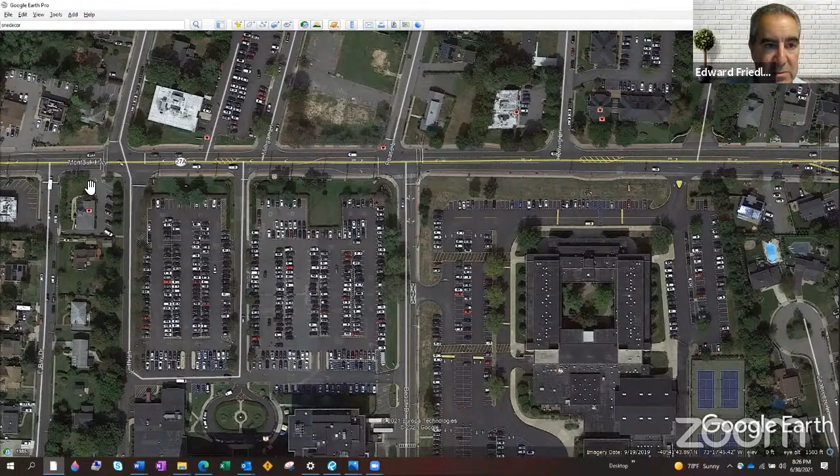Yes, it was looked at. I understand the issues in terms of the confusion - there's the left turn and people are still continuing forward. We did look at different phasing options, but without correcting the geometry, nothing was going to be able to remedy any of these issues. They're generally driver error, just people not understanding the geometry as you approach the intersection.

We have already pushed the access as far to the west as we possibly can. There is no other ability to push it further to align it, unfortunately. So the way it's phased is the most appropriate. If we were to change the phasing in this area to change the approaches and how they access the intersection, the delay at this intersection would, to put it simply, go through the roof, because we would be adding another phase to that intersection. So the delays and the queues would expand quite a bit.

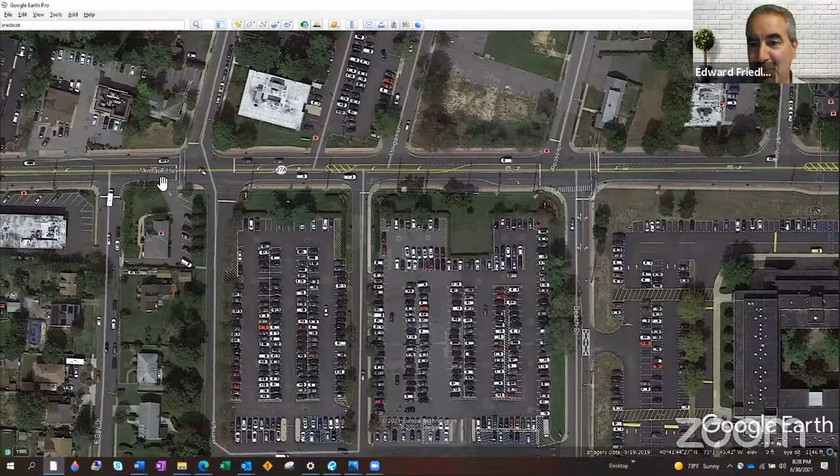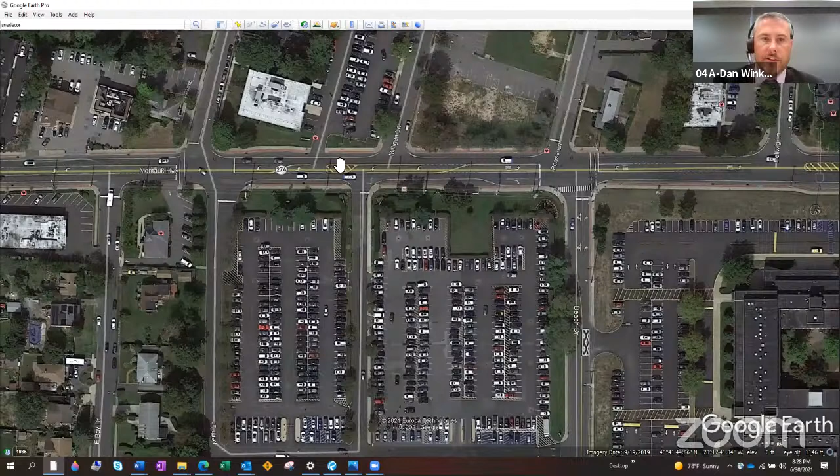Something I'll probably drill down into after the meeting and maybe submit some questions for Mr. Colgan, really just trying to understand. I know we keep saying the traffic counts are going to decrease or not really increase. I'm just still not sure where they're all going if we're decreasing. The people still are getting into the facility, right? We're just decreasing at certain locations and increasing at others. So this location, essentially this location and this location receive the bulk of the traffic. The traffic at this intersection and this intersection is being balanced by adding it in this location. So how many additional trips are being added to that location?

If you don't have it handy, you can certainly submit this afterwards to Mr. Colgan. I can review it then. Yeah, I will certainly submit that afterwards. That'd be fine. So I just really want to get a better understanding. The main concern this evening certainly was traffic. I think the easterly, westerly question you've answered for me, but I'd like to see where they're being pushed to, the cars that are coming in and out, and what impact that'll have would be my concern there.

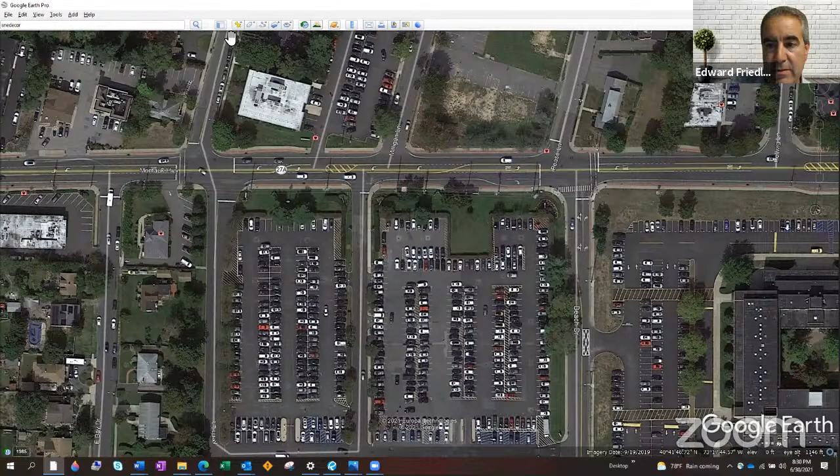Understood. And since you brought it up, Dan, I think it was brought up by Ms. Ludwig, and I'm familiar with what she's talking about. I know you said you've pushed that entrance lane as far west as possible. As a result, there is very little landscaping on the hospital side up against those properties on the northerly part of the Good Samaritan property on the west side. Is there something that can be done to increase landscaping along that northerly part of the property? I can answer that, certainly can, yes. Okay, that'd be great if you could look into that for us.

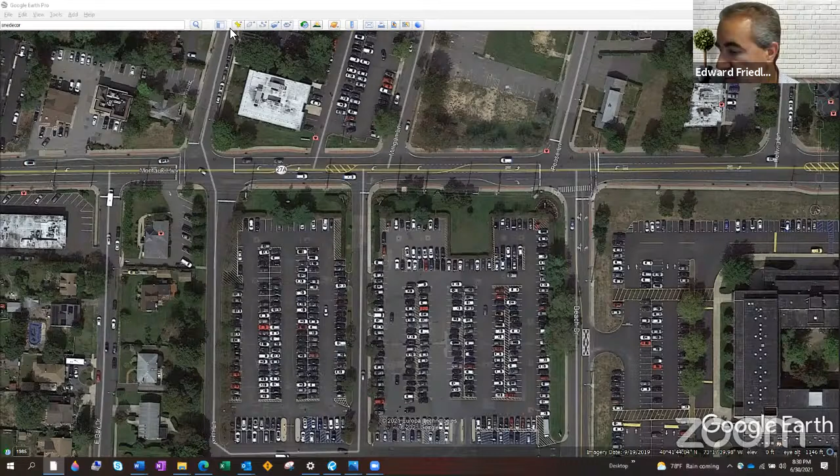Absolutely. I want to turn to other board members. I thought Mr. Moriarty, did you have a question earlier? Yes, I do, Mr. Chairman. It's a design question for the applicant. Could someone explain to me the location of HVAC systems, mechanicals, and the like? Are those going to, I assume they're rooftop, be exposed to the public, or are those going to be shielded, or how's that being handled?

Yeah, I can answer that. The first floor of the building is the emergency room. The second floor are the operating rooms. The third floor is what we call an interstitial space, a mechanical floor. So all of the mechanical equipment is located inside the floor. If you recall the renderings, the rooftops are pretty much smooth, right? There's no ductwork, no chillers or anything like that on the rooftops. There will be some fan exhausts that you can't see from the road. The purpose is to provide a clean aesthetic look to the building, but also, frankly, it cuts the cost because we don't have to run ductwork and wires from the roof all the way down to the first floor. So the direct answer is all of the mechanical equipment is located indoors in this interstitial mechanical floor. Thank you, that's good to hear.

In all honesty, if you look at some of the south side buildings that have gone up, a lot of significant mechanicals are out in public display. It doesn't... yeah, it's crazy. I know, it's a very unattractive look, to say the least. So that's good to hear that you've integrated those into the buildings. Thank you.